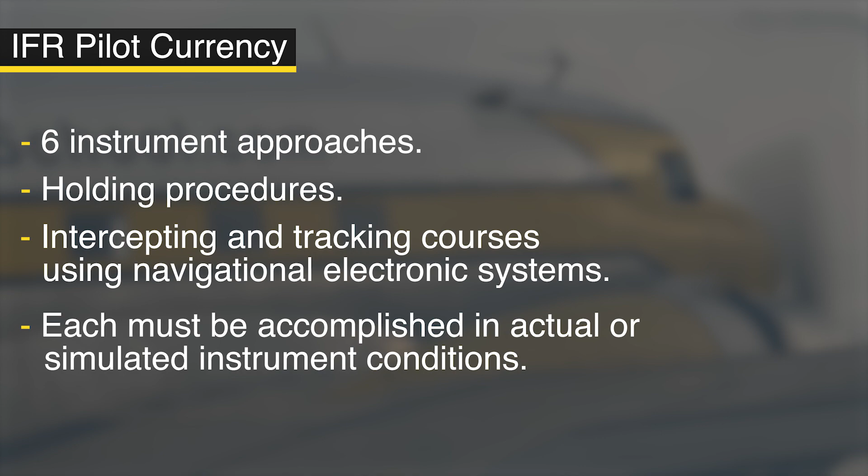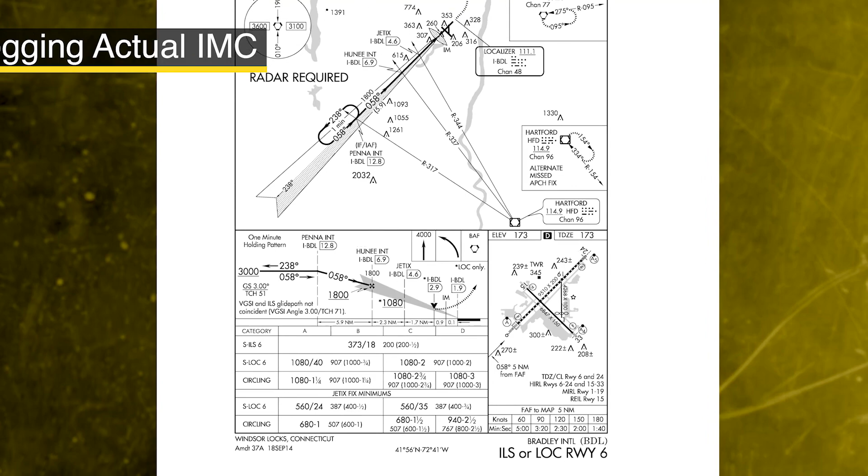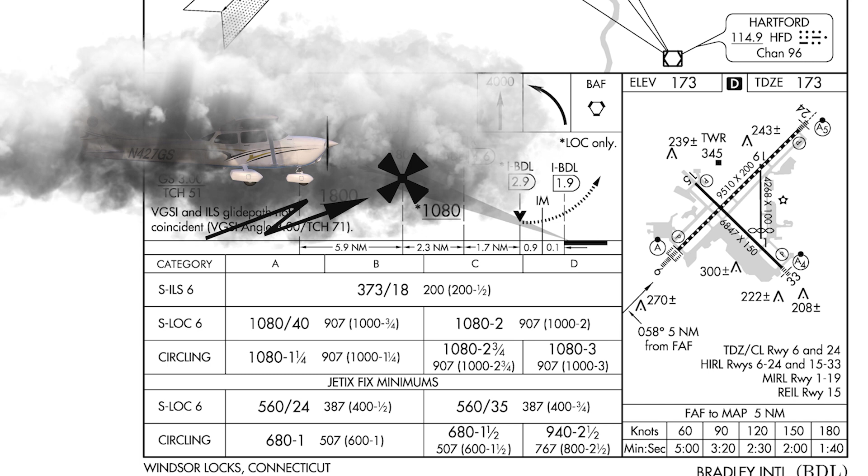Logging approaches in actual instrument conditions has some strings attached. According to the FAA, you cannot log an instrument approach unless actual instrument conditions exist at or beyond the final approach fix. So you could be flying for hours in IMC, intercept a localizer for an ILS through the initial fix, but right before the final approach fix, the weather clears up. According to the FAA, you cannot log that approach.

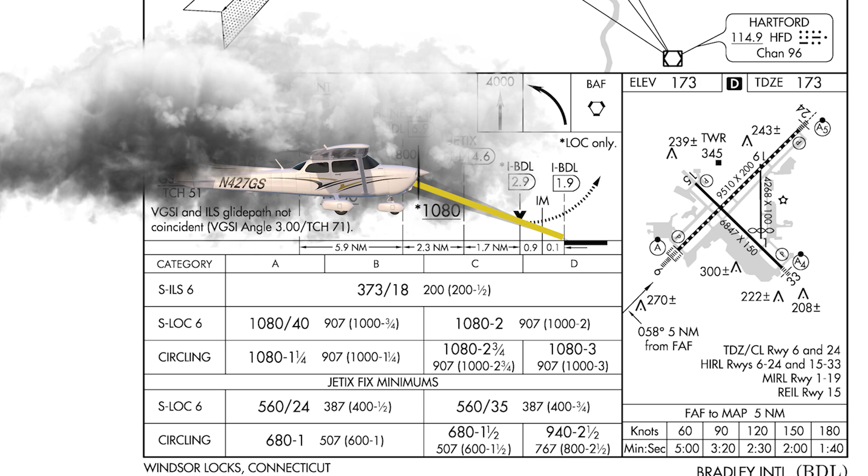But if it is IMC at the final approach fix, you do not have to fly the approach all the way to minimums to log the approach. You could intercept the glide slope at the final approach fix, decide to cancel the approach right afterwards, and still be able to log that approach.

Simulated instrument conditions could be accomplished one of 2 ways, either through the use of a simulator or using a view limiting device in the plane with a safety pilot. Keep in mind that unlike flying in actual instrument conditions, to log approaches using either of those 2 methods, you have to fly the approach all the way to minimums to satisfy the FAA requirement.

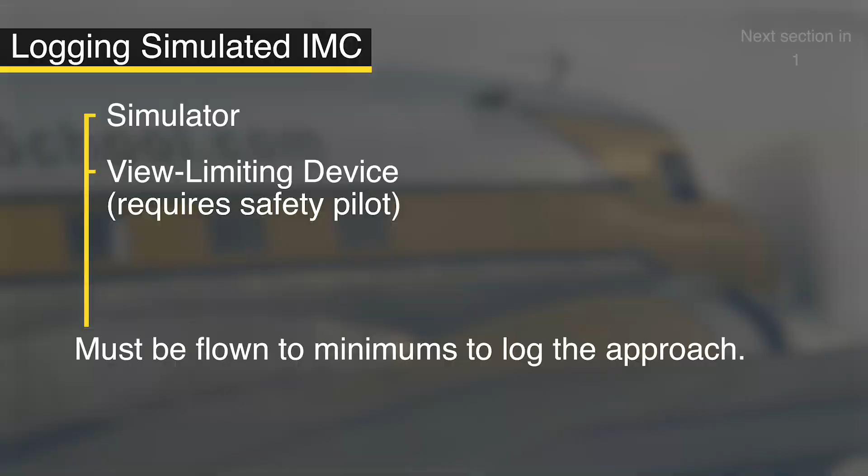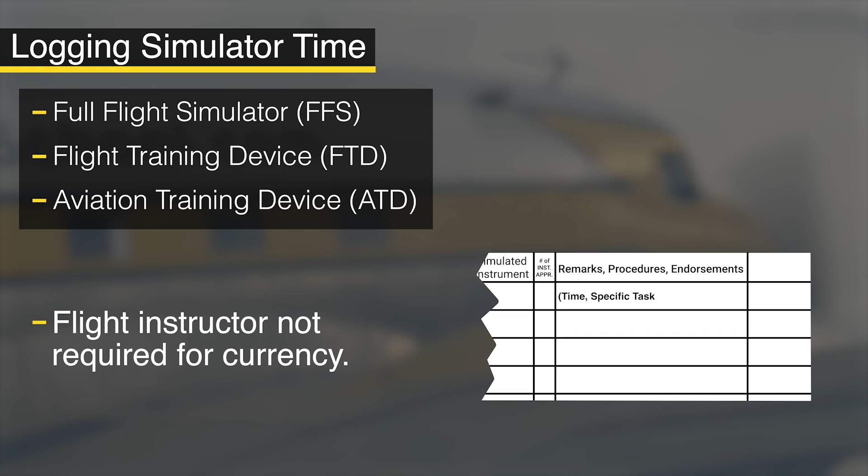As of 2018, the FAA has adjusted their stance on simulator usage for IFR currency requirements. Now, an instrument-rated pilot can use either a full flight simulator (FFS), a flight training device (FTD), or an aviation training device (ATD) to accomplish those currency requirements. Since this is currency and not instruction, a flight instructor does not need to be present, but you will need to log the time, the specific task completed, and the type and identification of the simulator used.

The original way of simulating instrument conditions is in the airplane using a view limiting device, like foggles. The caveat here is that you'll need to be accompanied by a qualified safety pilot. Unfortunately, this can't just be any Joe Schmo off the street. Your safety pilot must hold at least a private pilot certificate with the appropriate category and class ratings of the specific aircraft being flown. If the safety pilot is not acting as pilot in command, they do not need to be VFR current.

Now, what does need to be current, though, is their medical certificate. If they're not acting as PIC, they have to have a current Class 3 medical or higher. If they are acting as PIC, which is something that will be established between the 2 of you before the flight, then they do have to be VFR current, and they can be operating under basic med.

The last rule is that they must occupy the other control seat. They can't just be in the back looking out the window, and your airplane is going to need to have dual controls. If you're using this method, make sure you log both your name and the safety pilot's name in your logbook for the flight.

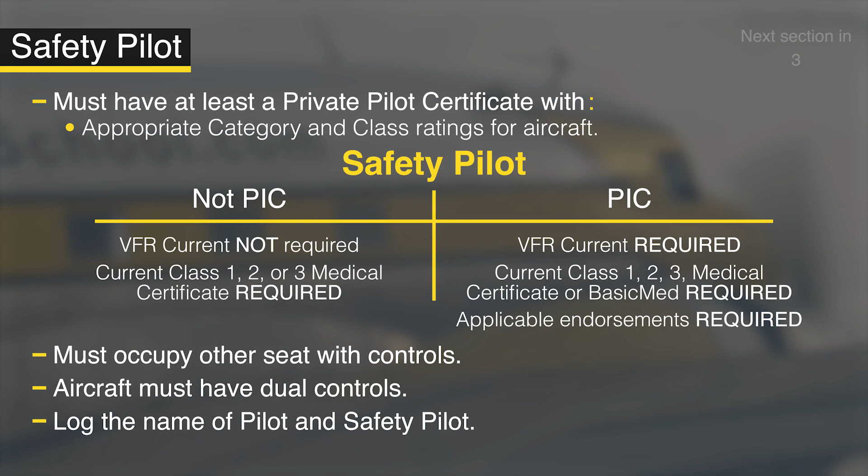Now let's go back to that time frame thing. You have to accomplish these required tasks within the last 6 calendar months. So let's say you've accomplished all of these tasks in December and you want to fly an IFR flight with your friends in July. Since these are calendar months, you remain current through the last day in June.

But starting July 1st, you're no longer instrument current, and you now fall into an additional 6-month period where you may accomplish the required currency tasks using any of the previously mentioned methods. Remember, you're not allowed to fly as PIC under instrument flight rules until you've accomplished these tasks, so your friends are going to have to wait.

Now, if another 6 months go by, then the only way to regain your currency is by accomplishing an instrument proficiency check, or IPC. An IPC must be accomplished with a CFII, and it's a full review of all the knowledge and procedures needed to fly in instrument conditions. Think of it like a mini check ride, consisting of a ground portion and a flight portion. You can find all the information listed in an IPC in the ACS.

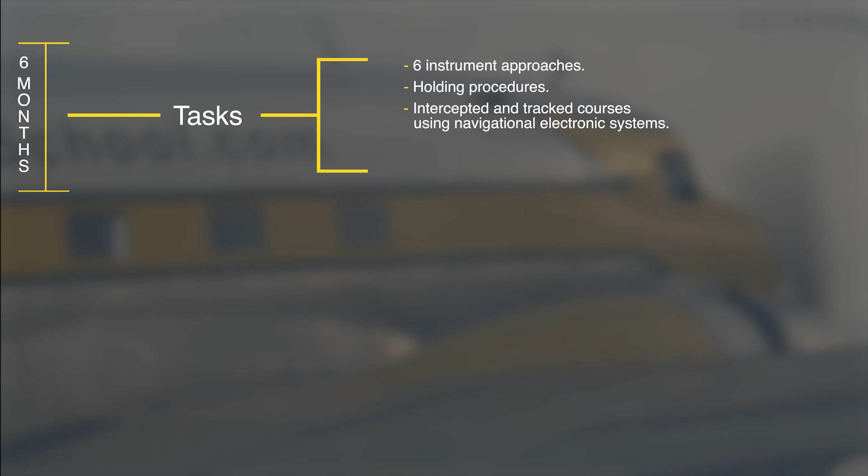So let's review. In order to be IFR current, within the last 6 calendar months, you must have executed 6 approaches, performed holding procedures, and intercepted and tracked courses using navigational electronic systems. You can accomplish these in either actual conditions or simulated instrument conditions.

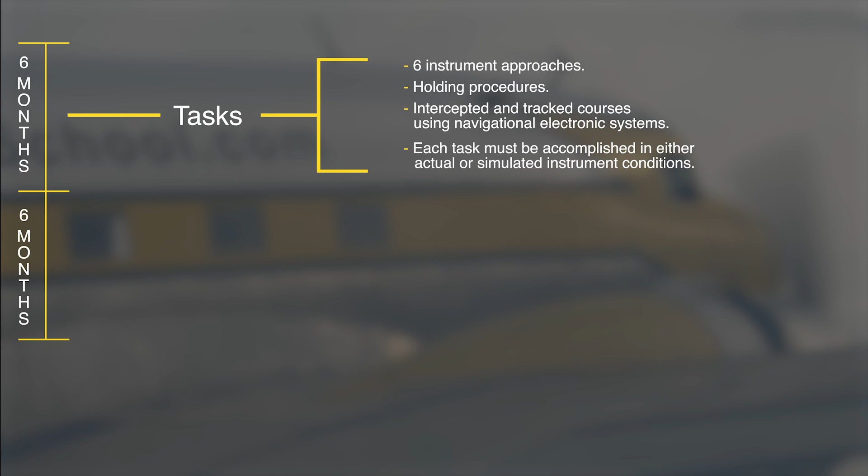If not accomplished within the last 6 calendar months, you have an additional 6 calendar months where you're still not current, but you can accomplish the tasks without an instructor. Now, if a full 12 months pass without doing the required procedures, an instrument proficiency check is the only way to become current.

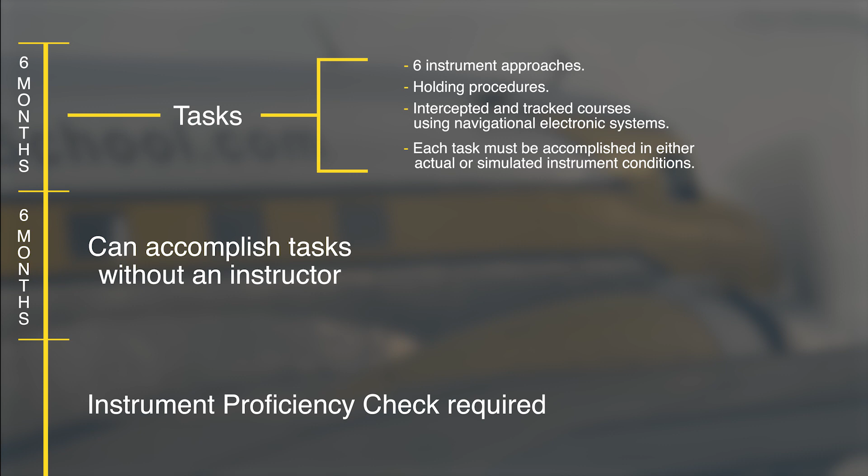There will be some questions on the test about these, so make sure you have a good grasp on what it takes to stay current.